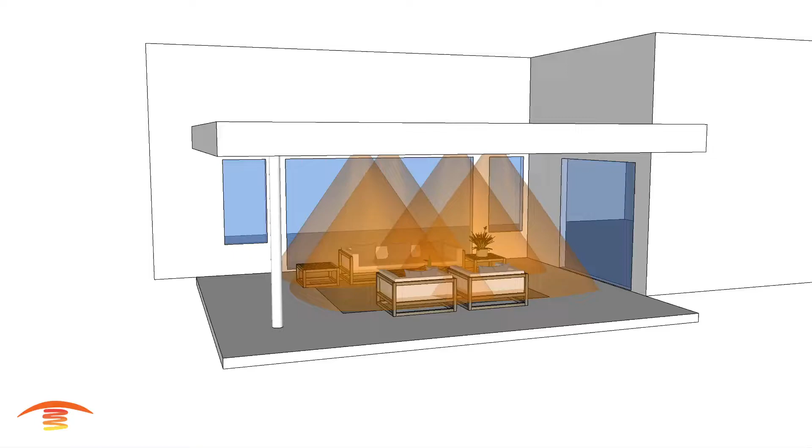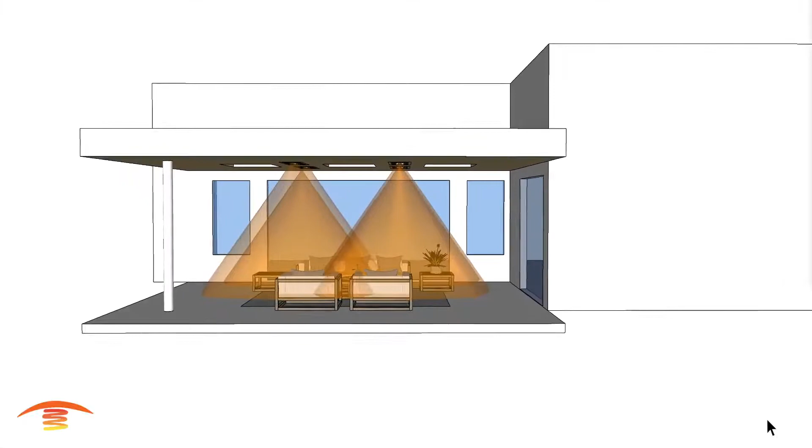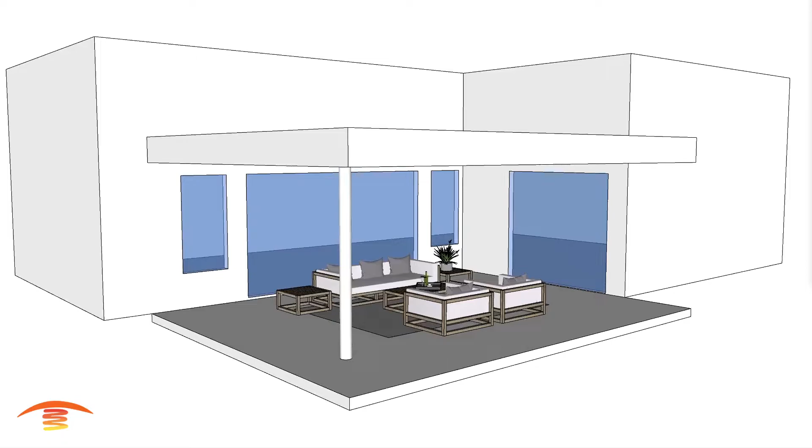Now let's get heating. Alright, so here we have a residential application, so let's go right into the overall dimensions. First of all, let me just turn off these rays here. Sorry, 1 second here. There we go. All right, here we go with the dimensions. So we have this patio. We have a 9-foot ceiling height here,

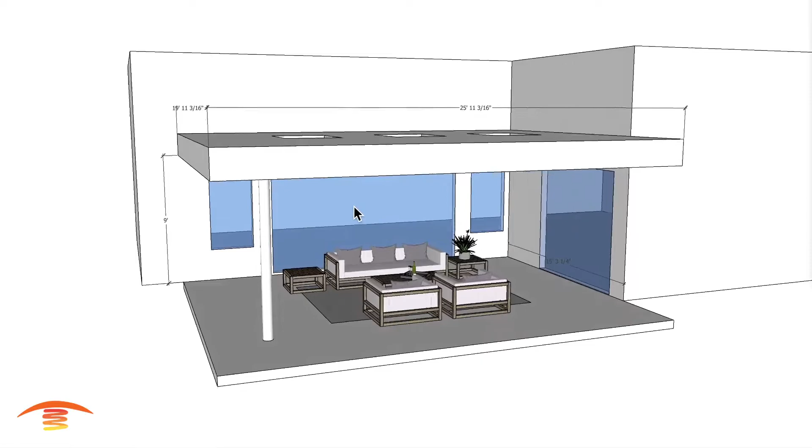19.3, or 19.11 and 3/16, on this dimension of the overhang, and then 25.11 3/16 this way here. We have an opening here of about 15.3 1/4. I think that's about it. We do have the skylights here, so that's important.

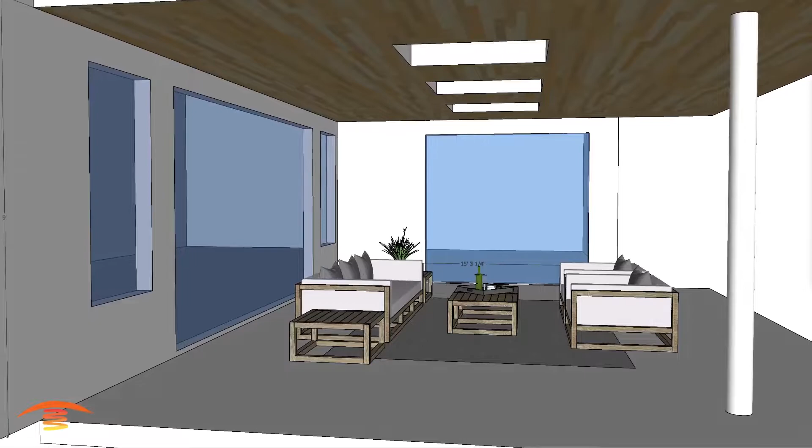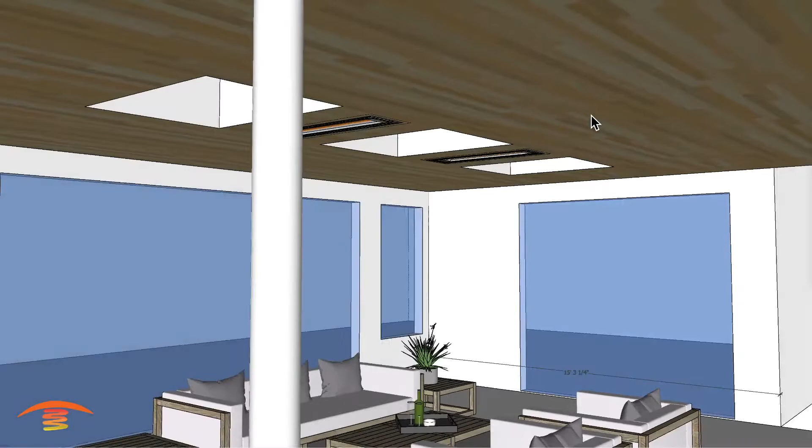Now, this client had asked for just heating the center portion of the patio, and they were very interested in just placing a couple of heaters between the skylights here. So that is going to look something like this, and we have 2 of the 5,000 watt units centered within this opening here, and also centered within this opening in this direction. It's a pretty basic, simple application.

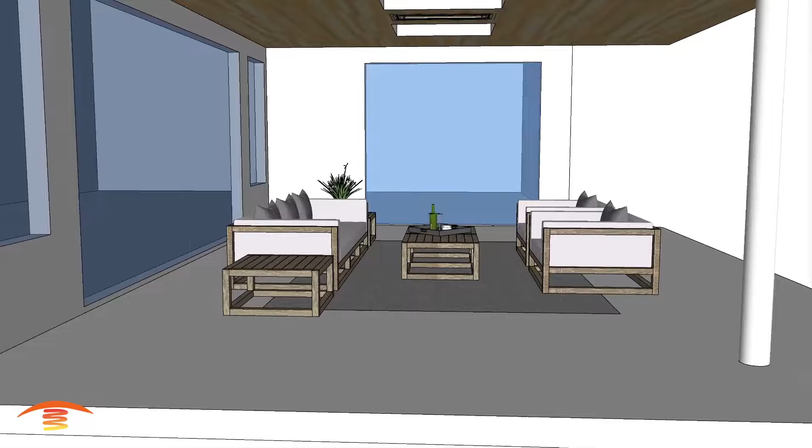I believe these doors are sliding doors, so we're not worried about any of the doors opening into the patio section, so the clearances shouldn't be an issue. But you can see here with the tongue and groove ceiling, there should be no issue with placing the heater at the same elevation as the ceiling as far as the heater itself is concerned.

So you can see that I have the heater's flush mount kit recessed behind the tongue and groove, but the elevation of the heater itself has to be at the same elevation as the bottom of the tongue and groove. And that's going to be true on all these examples I'm going to show you here.

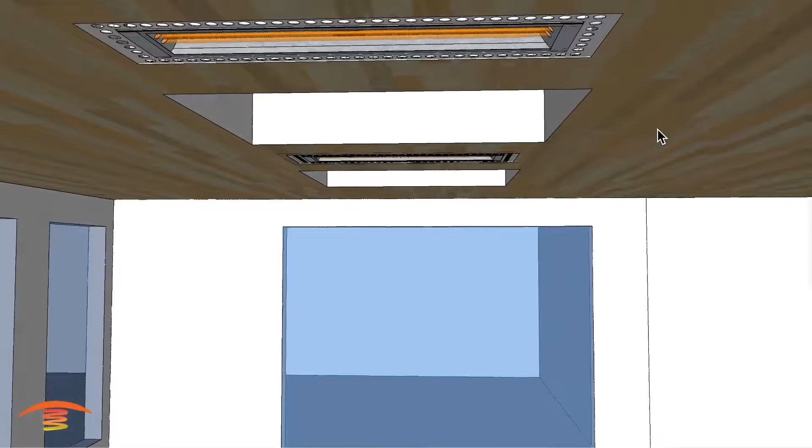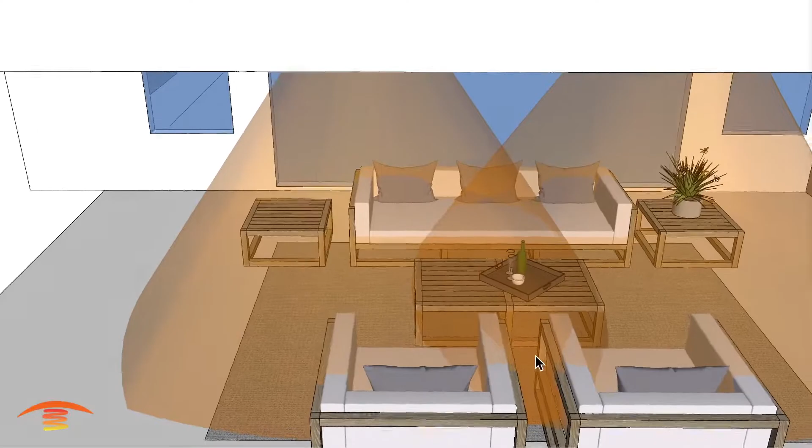So with this particular application, which is their preferred, you'll see that the ray on a 5,000 watt unit 9 feet off the ground isn't going to heat up the entire space effectively or efficiently. If you're sitting right here, you're going to be okay because you've got 2 rays hitting your body, and same over here. However, the height of this application is a little bit beyond what a 5,000 watt really should be installed at.

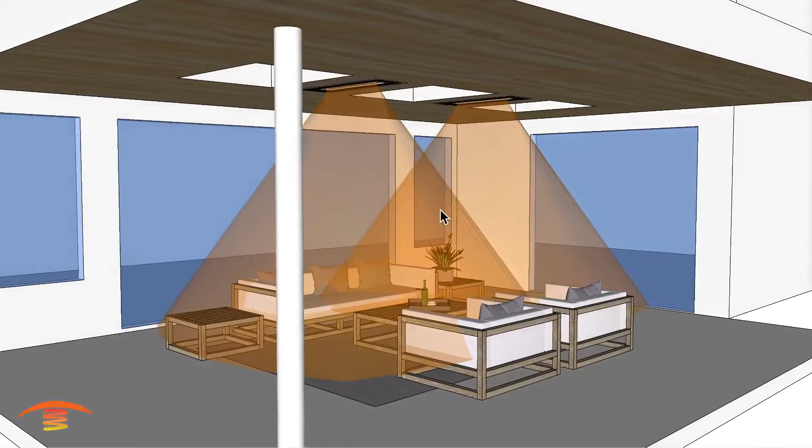When I talk about heights, I'm talking about seating heights for the most part, normal seating heights, reclining, not bar stool height or something like that. So in any case, this is okay. However, it's not the most preferred for my taste. I would say that you would probably want a little bit more heat.

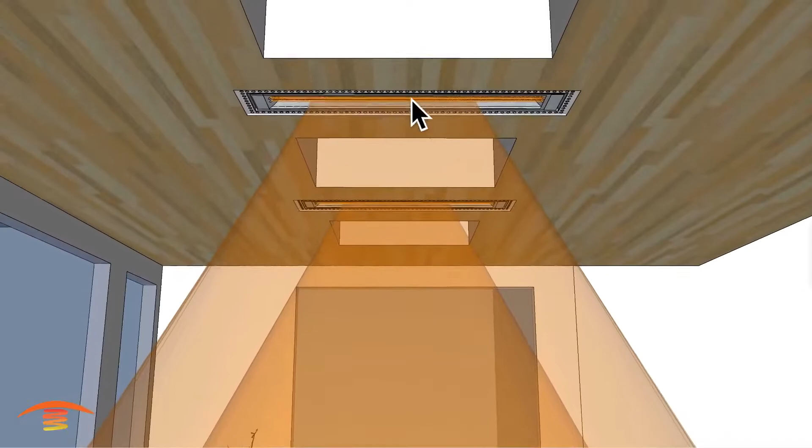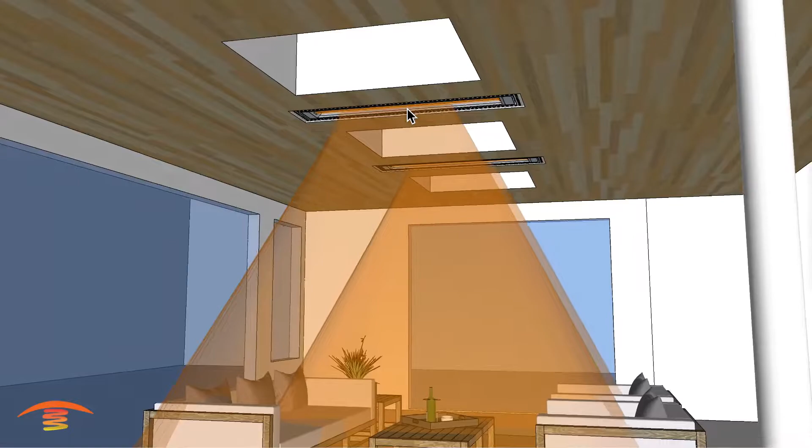Now, what I went ahead and did was set up a 6,000 watt unit. This is a 6,000 watt 240 volt dual element unit. You can see that it comes a little bit beyond the skylight openings, but it is centered just like the other one, within the space in both directions. And the footprint is more intense for this elevation, so it's a better application.

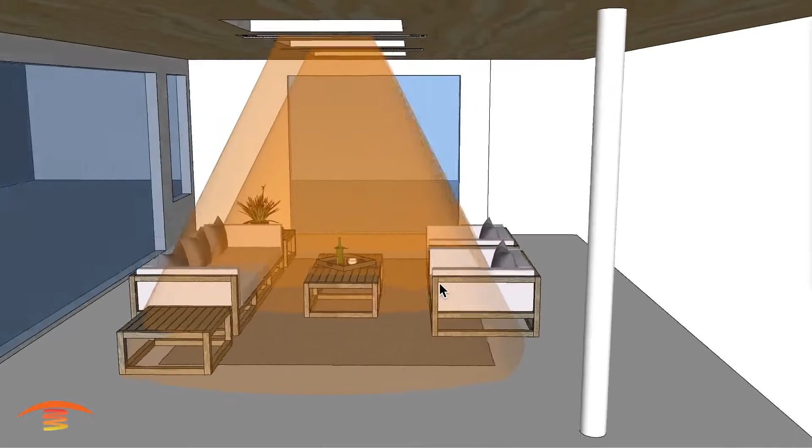But it does go a little bit wider than the skylights, and I'm not quite sure if that's acceptable to this particular client. But I would say this is a better application if this is the only space that you're looking at heating. The best footprint you're going to get on an application like this, 9 feet off the ground, is about a 10-foot throw this direction and about a 9-foot throw this direction.

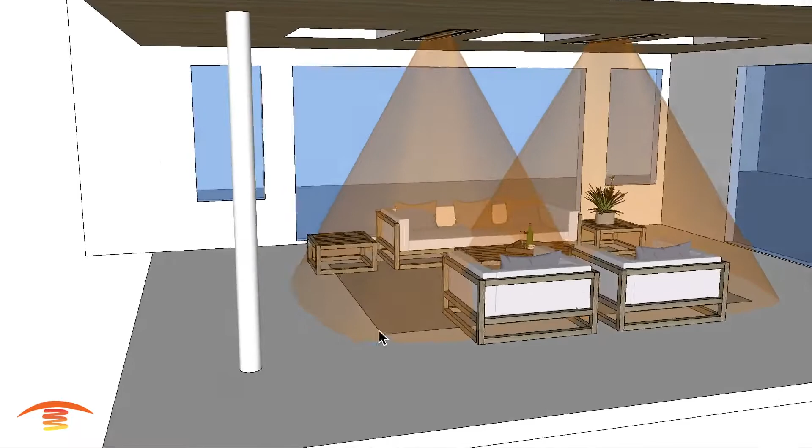If you had just another foot higher, you can see the span of the ray goes a little bit further, so if it was 10 feet off the ground, you would get about an 11-foot throw and about a 10-foot throw this direction here. But the intensity is much better at this application.

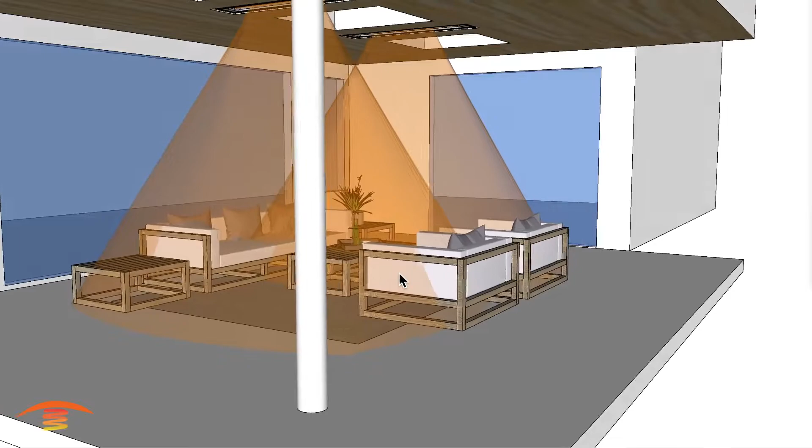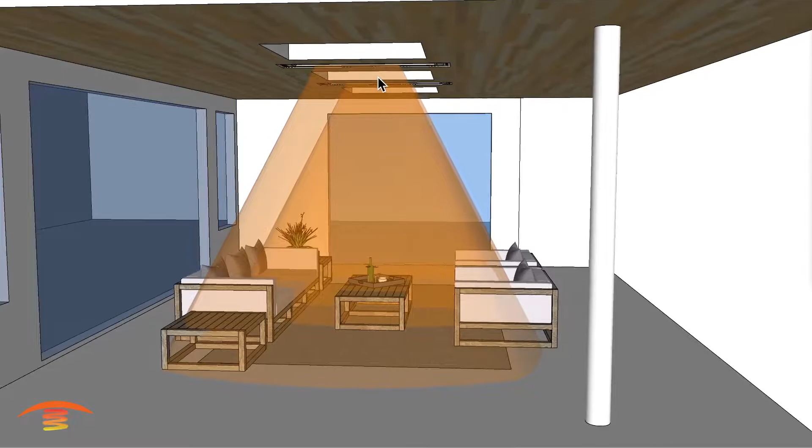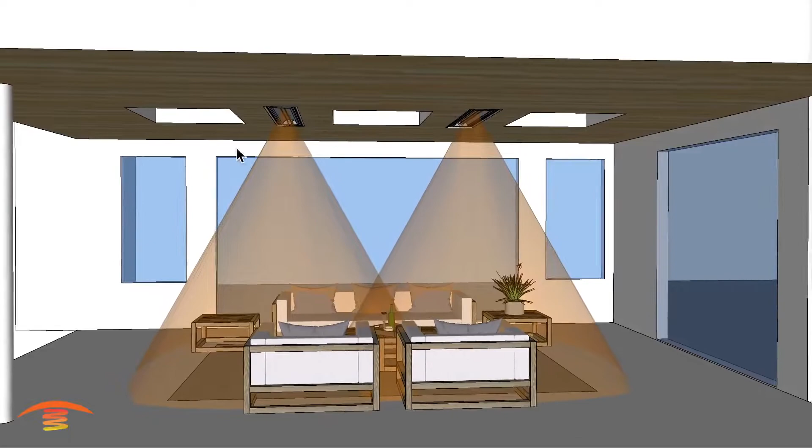Now you can also use a full control system where you can dim the system from 100% on to 1% on, and that's true with the other system as well. Or you can go with a duplex system where you can just turn one element on, one element off, and use adjustability with say 50% on, 100% on. And in this case, if you were to combine the two, we've got 25% to 100% of the combined output.

All right, so that would be the second option, and if you were just going to put 2 units in, this would be my preferred application. But let's go a little further to a third design, which would be 4 of the 5,000 watt units, and this will give you a much nicer spread. You're getting a lot better coverage throughout this whole seating position, and you can see that I have the seating position within this back wall here, and about 3 feet back here.

So depending on how much room you really want to heat up, I would say that this would probably be the best application. Again, it's still true that this footprint of heat is really designed for a slightly different height of application. However, with this doubling up, you're going to get much better warmth and coverage. Here and here, you've got a lot of overlapping, so that would be a much warmer application. All right, well, I hope this has helped.